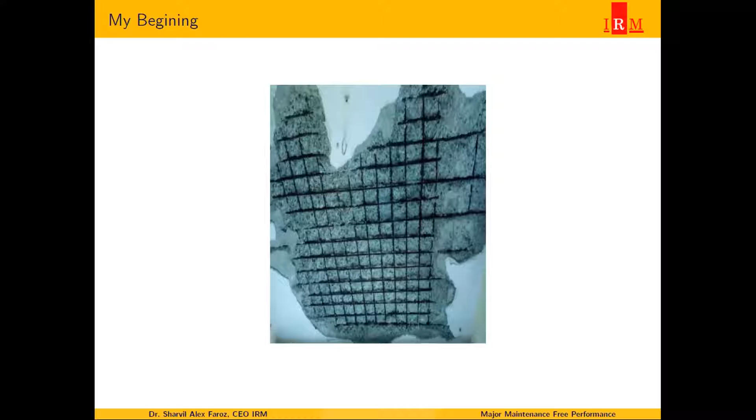So my only motivation when I began my career was to prevent such a thing from happening, and that is how we came to the technology of major maintenance free life for infrastructure.

You might be asking me, is corrosion the only effect which causes such deterioration? Of course not. There are many kinds. There is chloride induced corrosion and carbonation induced corrosion. There is also loss of concrete strength over time, and in case of bridges, loss of pre-stress. So all of these are factors which cause degradation or such collapses.

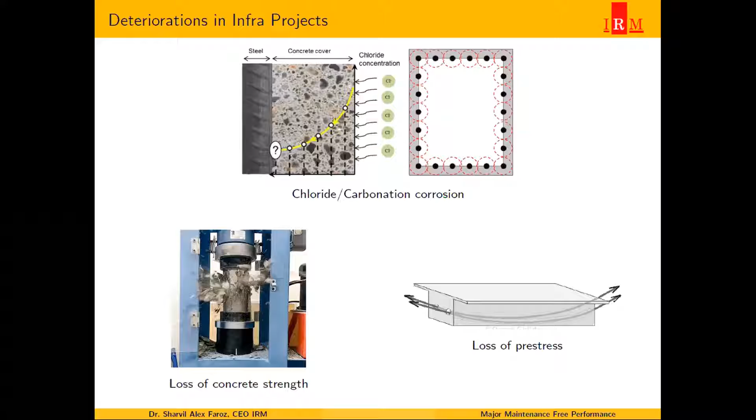But to keep the focus very limited for this presentation, I am going to talk only about chloride induced corrosion. Since I am getting only 1 hour for my presentation, I cannot cover everything, but I will focus only on chloride induced corrosion.

Chloride induced corrosion has been found to be affecting everybody everywhere. Even that electricity pole which is there - Sawantwadi is about 20 kilometers away from the coastline, and even there we find that these simple concrete electricity poles are also corroding. I will give you two international examples of this.

On the left, this is known as the Ullasundet Bridge, built in Norway. After construction, within 25 years, this bridge had to be demolished. You can see it is in a very marine, chloride rich environment. Within this 25 years, they had to continuously keep on repairing this bridge again and again, and at the end of 25 years, you'll be surprised to know the cost of repair was equal to the original cost of construction of the bridge.

So just imagine, today we are talking about 100 years life for bridges and infrastructure. If we wanted to keep this Ullasundet Bridge for 100 years with repairs every time, we'll have to spend 4 times the project cost. So once you spend one amount for constructing, you then keep on repairing it.

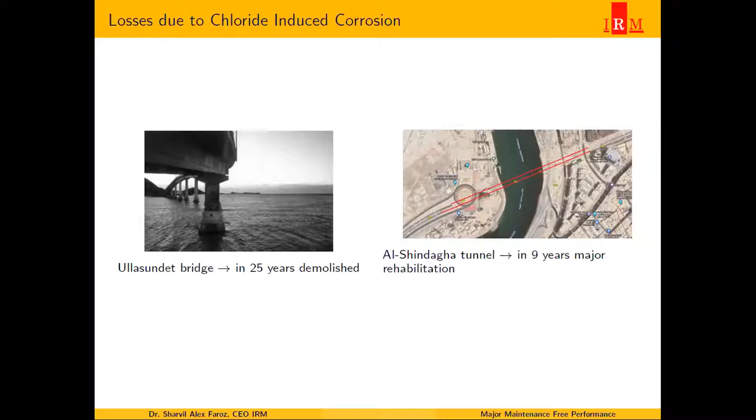This one, the Al Shindagha tunnel on the right side, is in Dubai. This also got so much corroded - it is under a river very close to the sea, so there is a lot of chloride. Within 9 years, it had to be rehabilitated. So you can imagine how severe chloride-induced corrosion can be.

Now, before going any further, you might be asking me, what is major maintenance free, and what is just maintenance free? There is a difference, let me tell you. Just maintenance and major maintenance are completely separate terms. Just maintenance means regular cleaning of the bridge or any infrastructure, keep giving paint to that bridge, cleaning it - this is known as maintenance. This maintenance we cannot avoid, we have to do it.

But what is major maintenance? Major maintenance is the rehabilitation which we do to the bridge after it has deteriorated severely. As I told you, for the Ullasundet Bridge case, that repair cost is 4 times the project cost. So that is where I am focusing - on major maintenance free design for a particular infrastructure, so that you do not require to do any kind of repair in the future at all. You design it now itself in such a way that it does not require any major maintenance in the future. That is the overall concept of my presentation.

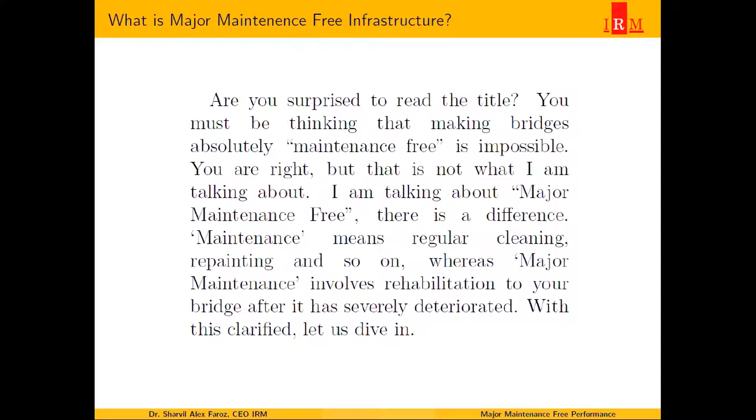Since I have been working in this industry, I have been in contact with various bridge owners and infrastructure owners. They have come across this trouble where they have to spend a lot of money just to do the rehabilitation of bridges. They are becoming aware that if we design it for a longer period of time and delay the rehabilitation, we'll save a lot of money, and that money will help develop our nation. Instead of just spending on repair, we can spend that money on the development of our country.

So I have always come across these 7 questions. In summary, what all these 7 questions are is, they will always ask me: can you design this particular bridge so that it will last for 100 years? Okay, now it can last for 100 years. But what is the point if it lasts for 100 years and you have to repair the bridge every 5 years? So what they are intending is, can you make this bridge completely rehabilitation-free for 100 years?

Then, what is the first time of rehabilitation? This is a very important question when you consider existing bridges. Existing bridges which were not designed considering maintenance-free technology are always going to have a rehabilitation problem. So this is also one of the issues. When should you do the first repair of the bridge?

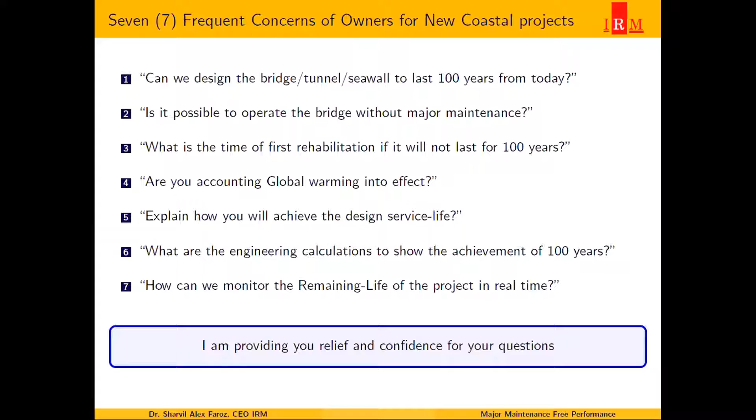So basically these are the 7 questions, as a summary I have told you. And as a company which provides solutions for such issues, what I am basically providing is relief from these questions which could be arising for such infrastructures. So now I'll begin.

First few slides I will always dedicate to research, because without research nothing can be done in this world. So a few slides on the research part which we have done before coming to the industry, as part of my PhD at IIT Bombay.

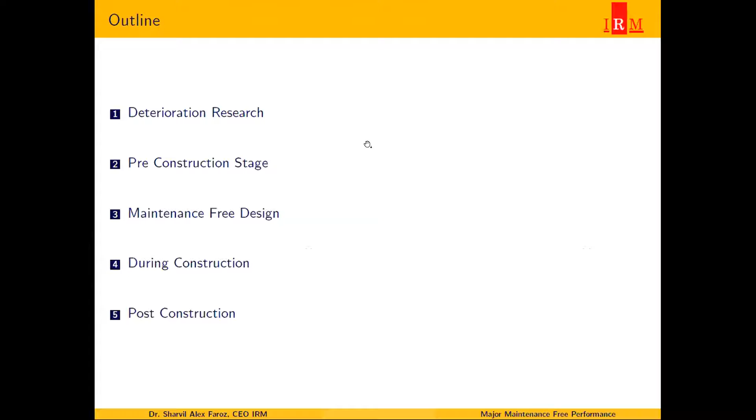Primarily this part of the research, we wanted to understand how exactly the corrosion is affecting the structure. So we had to study the effect of chlorides on concrete and on corrosion, how it affects the strength of concrete and the strength of the steel. So we had conducted a lot of lab tests.

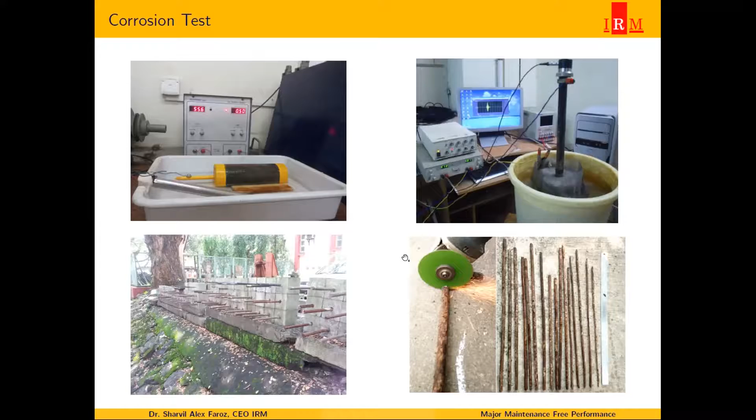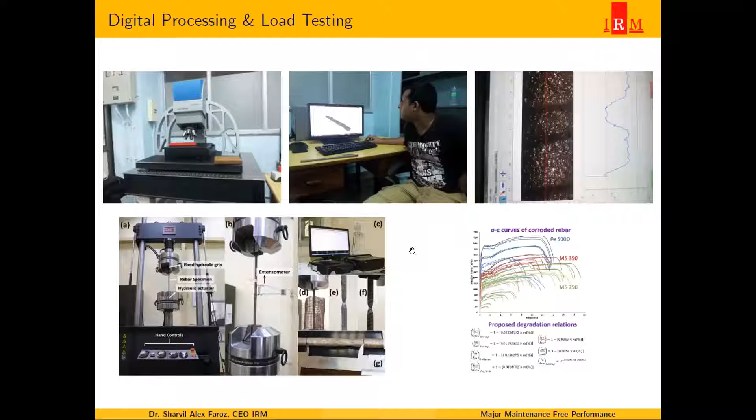We also did a lot of actual exposure tests. We also got a lot of concrete samples from existing infrastructures for performing tests, so that our lab tests could be related with the actual site conditions. We also did a lot of advanced laser technology to identify the variation of strength due to corrosion, how corrosion is affecting the rebar. We found out that as the level of corrosion increased, how does it affect the strength of the steel reinforcement.

Then, how does that chloride travel through the concrete? How does it go into the concrete? That also we had studied, and we developed models to understand, for every type of concrete, and for a given amount of chlorides attacking it, what will be the speed at which that chloride goes into the concrete. This is very important to know, because I will explain it to you later.

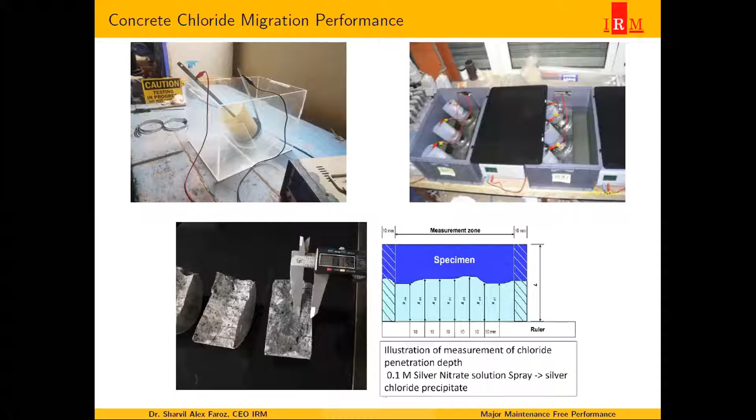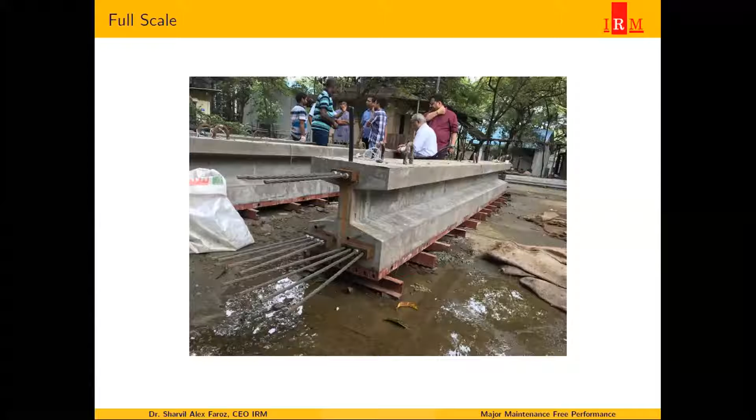We also did full scale tests. We did a pre-stressed I-girder concrete girder and saw its performance, how it behaves under corrosion. So our technologies are very tried and tested, and we have also implemented one project which I am going to show you, where we have done these calculations for them. That is the case study which I am presenting to you.

One slide about my company, because unless you know what I am doing, you won't understand how I solve the problems of our nation. We are the people responsible to deal with any kind of infrastructural troubles you have.

We have 4 specializations. One is remaining life analysis - what will be the remaining life, how long the structure can last without rehabilitation. Target life rehabilitation - very specifically, I want a life extension after rehabilitation to be 10 years or 15 years precisely. We have the capability, since we know how the material behaves under deterioration, to provide you with the exact life.

Life cycle management and structural health monitoring. Today's focus will be maintenance-free strategy. That is what I am talking to you about today.

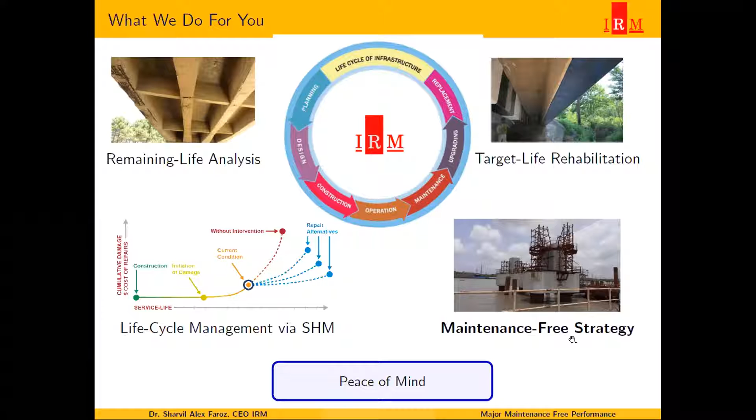Now you will ask me, what does it mean by 100 years? Of course, these new bridges - you might have heard many metros are coming in our state, Mumbai Metro, Pune Metro, Nagpur is there. They are all specifying in the tender document a life of 100 years or even 120 years.

Now you can put in the chat - how many of you have come across some consultant designing this? How many of them give the guarantee that this structure will not have any major repair during its life? I did not find it personally. Whenever I asked clients' consultants who have been working with them - but because of trouble from these major repairs occurring, they contacted me to solve their problem. So I asked their consultant, do you give a guarantee that there will be absolutely no repair for the structure? They say we cannot give that. But then I tell them, the code says your structure should be without any necessity of major repairs - how do you answer this? So they say we don't know how to do it.

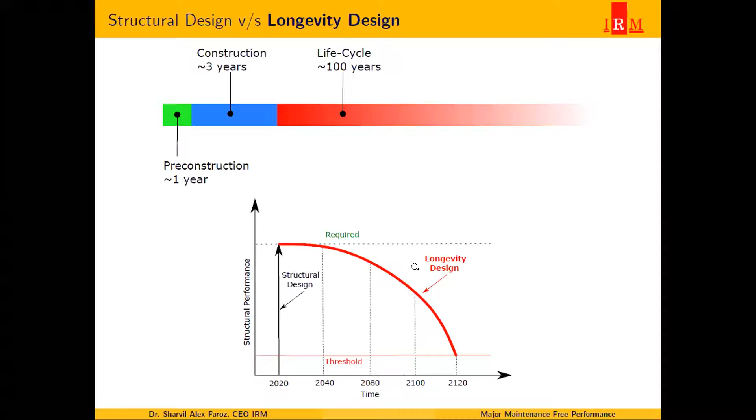So I'll be talking about the Mumbai Coastal Road project. This is a very famous project going on right now in Mumbai, famous because of many controversies - it has been stuck, then started, and so on. This is a very coastal area, highly affected by chlorides. Therefore, I chose the topic of presentation for chloride-induced corrosion. It's not that other deteriorations don't happen, but chloride occurs at such a fast rate that the bridge will collapse because of chloride corrosion first.

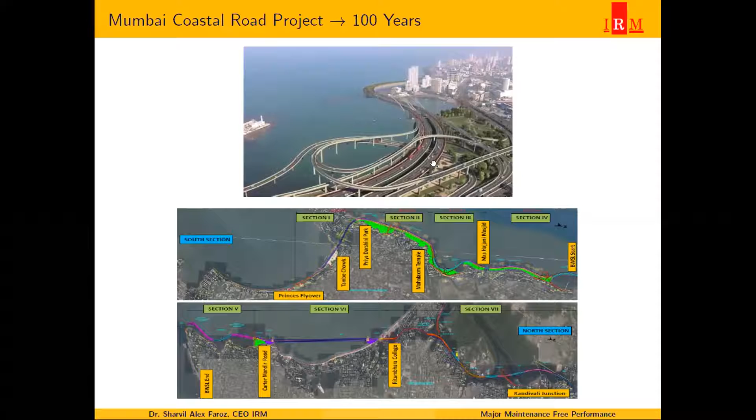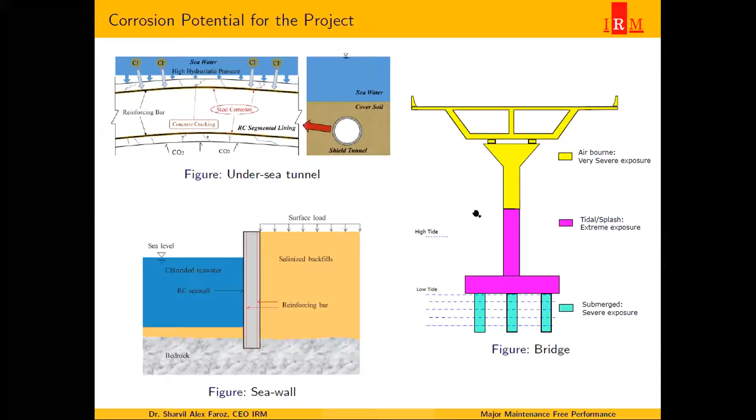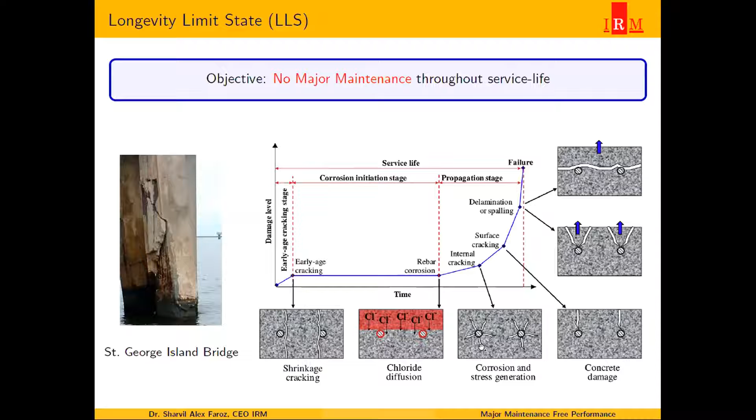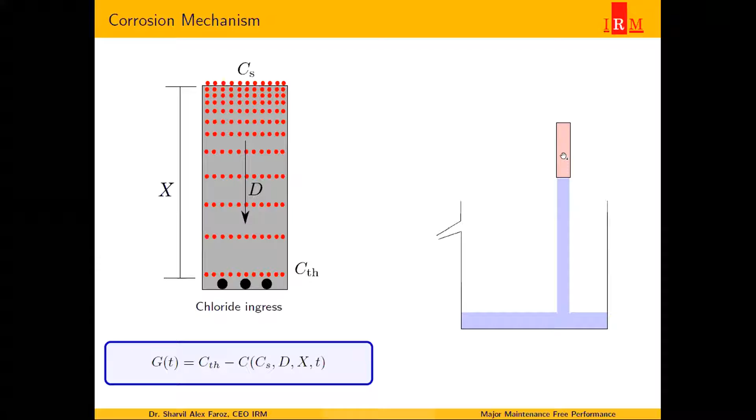To give you a simple example, consider that you are filling a bucket of water. This water which is falling inside, these are the chlorides. So you keep on filling it. After it has reached a certain level, the water will start flowing from this outlet. Similarly, when this chloride reaches a certain CTH value, only then will it start flowing and start corroding. So that is how you can understand this.

Now we have to put the design equation. This box you can see is known as the limit state function. We have seen limit state of flexure, limit state of shear, limit state of torsion. Similarly, this is also a limit state. I call this the limit state of longevity, because we are making it maintenance free, so it has to live long. What you see here is the CTH value, and this is the chloride concentration function, with D, X, and the time from the time of construction until what time is achieved. So when this equation can be equated to 0, our corrosion will just start. That is the limit state which we have to use for design of the structure.

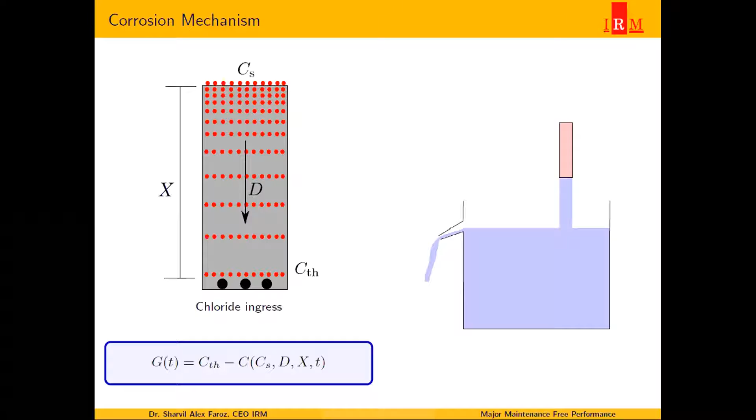Now I have shown you this slide before. All these terms are there. We have to define them, so whenever you take up a project, you have to define all of these terms first. Define in the sense not in words, but you have to quantify it. You have to go to the field, do some measurements, and know what are the design engineered values which we have to use for design. Just like when you are designing a girder or a beam, you need to know what is the live load, what is the floor finish, what are the earthquake forces which are occurring.

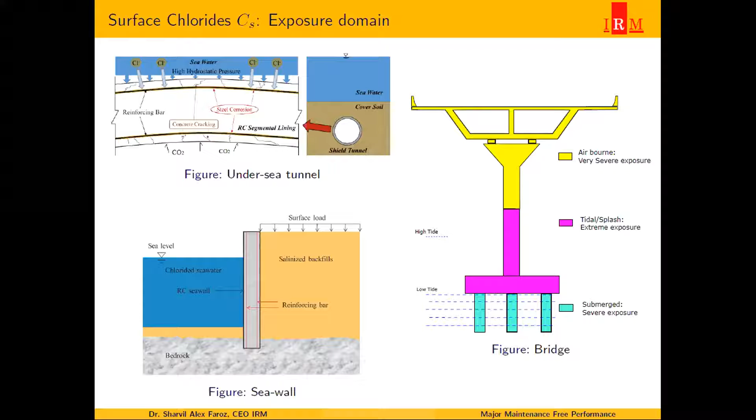Now you will ask me that in structural design we don't measure these values, correct? Do you agree with me? We don't measure because it has been standardized by the code. But in terms of deterioration, this chloride load varies from place to place. It cannot be standardized. One project I do in Mumbai, another project in Cochin, another in Chennai, all the conditions will be separate. So you cannot standardize it. We have to go to the site, perform the measurements, and then arrive at what is the amount of chloride loads. So we have to first define the chloride loads for each of these structures.

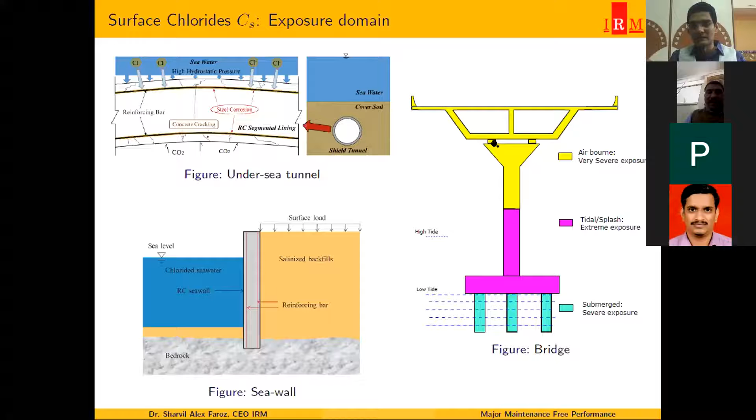Now for this project, the coastal road project, a lot of measurement has been taken along the coastal region, and we have come up with what kind of chloride concentration should be considered when we are designing each of these three structural components: bridges, tunnels, and the seawall. So we have defined this chloride concentration. It has a unit of percentage of weight of cement, always defined in terms of percentage of cement. So one meter cube of concrete you have taken, say 350 kilograms of cement added to this concrete, so the amount of chlorides will be defined in terms of percentage of this cement.

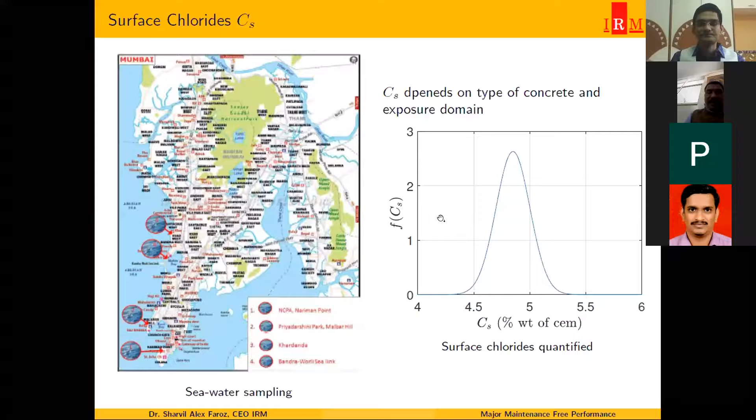Next, we have to define the concrete cover. Now this is very tricky. As per IS 456 and also IRC 112, depending on the conditions, we can provide a certain concrete cover for a given structure. Let's say 75 mm cover is provided. Do you think that while executing, the contractor will precisely provide exactly 75 mm cover?

But now the question arises: before constructing, how do we know what the variability will be? In that case, IS 456 has provided us a helpful guideline. It says that for rebar placement, they have given a tolerance for the cover. So they have said that for an actual provided cover, say 75 mm, plus minus 15 mm or 10 mm is also there, depending on the size of the structural member. This will be the acceptable level of tolerance. So we can use this in the form of a probability distribution as the starting point for doing the design.

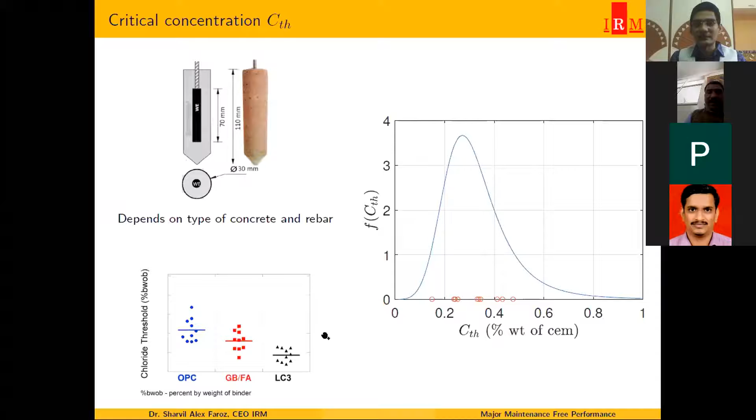So this need not be done again and again. Since we have all this database available with us, there is no need to do these experiments again and again. This is perhaps the most important part.

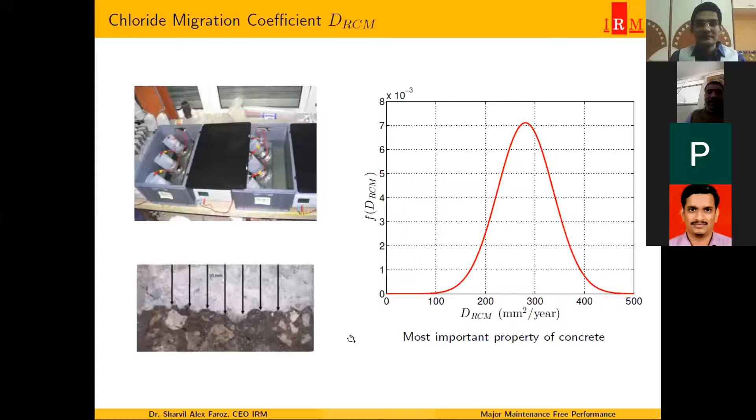The fourth part, which is the diffusion, or the D part, which we mentioned. How fast does the chloride penetrate the concrete? This is an experimental setup which you can see. In this lab setup, we force the chlorides to penetrate the concrete. This is the concrete sample which you can see, and the chlorides have penetrated into this white portion. We are fixing this time so that we are able to calculate the rate. So the depth we know, and the time required for going through that depth, we know. So we are able to quantify the rate at which the chlorides diffuse into the concrete. This is very important.

Now this property depends purely on the concrete which you are using, so this is a pure concrete property. We have worked this out for 30 concrete mixes, ranging from M30 concrete to M60 concrete.

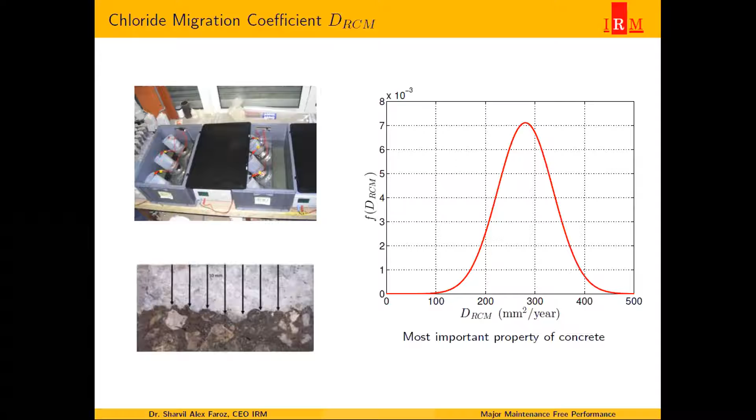We chose this range of concrete because these are the generally preferred concrete mixes for all bridge projects. So M30 to M60, we have in between 30 concrete mixes with various different kinds of cements, OPC, then supplementary cementitious materials such as fly ash, GGBS, and limestone calcined clay cement. Based on this, we obtained 30 concrete mixes, and we have worked out the rate at which chlorides enter into every concrete product.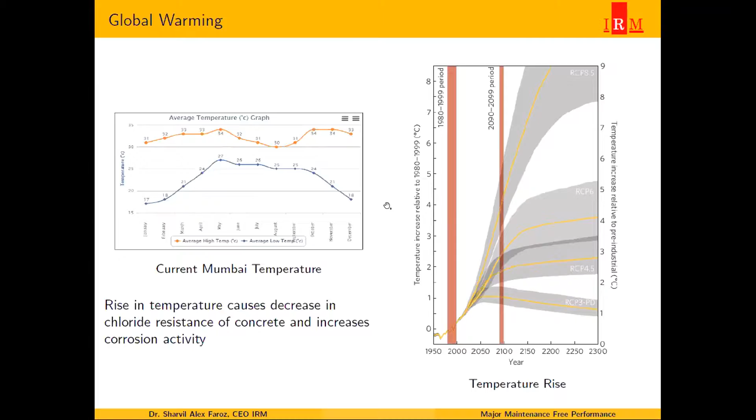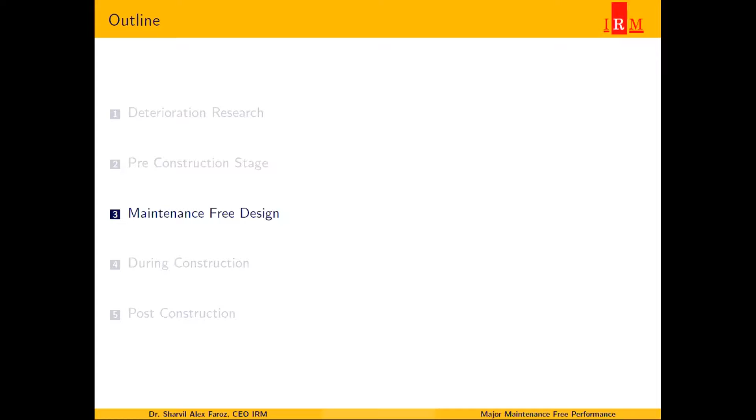So now we have done all our site projects and site measurements, we have quantified all the design parameters. Now it is time to design to make the actual project major maintenance free. This is our proprietary software which we use, called MFL 100 Plus. We developed this in our company, our own software which we use to design for major maintenance free, and all the calculations I'll be showing you are an output of this software.

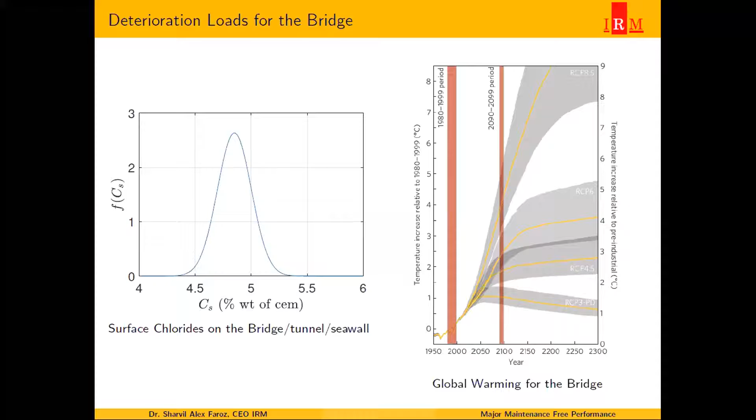So in this software, we first feed all the chloride loads, all the concrete related inputs, all the steel related inputs. Also the global warming prediction is given as an input to the software. So all our loads, all our deterioration loads are given as an input, and as an output we want the resistance parameter for the bridge project.

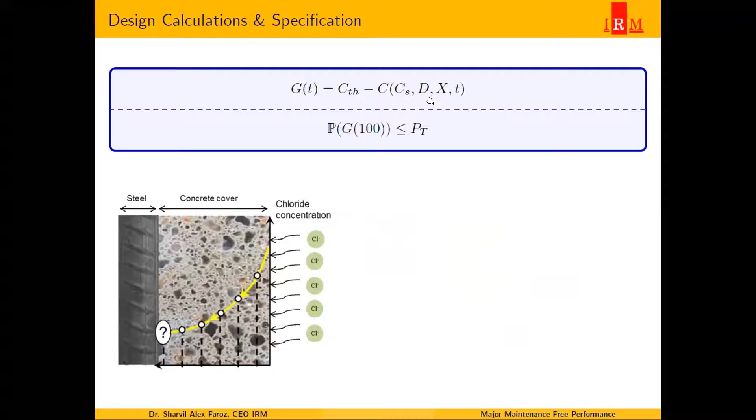So now let us see how the design calculation and specifications are created. I have shown you this limit state function called the longevity limit state function before. The speciality of this design is that it is not done in our regular deterministic form, it has to be done in a probabilistic form. So the actual design equation is this: the probability that this limit state function at year 100 is not exceeded should be less than a target probability of failure.

So in this equation, we have kept a target probability of failure. Now this target probability of failure completely depends on the importance of the structure and on the life of the structure. So if we have a long life, the probability will be less. If you have a shorter life, the probability will be high.

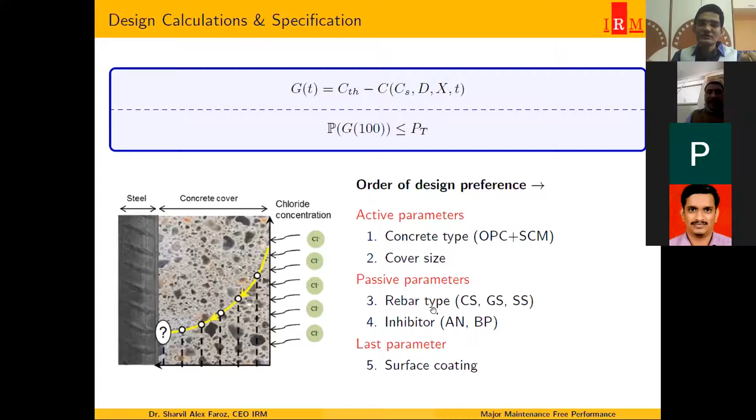Passive parameters are kind of more rigid to change because generally they are fixed, since they have limited scope to change. For example, if I use stainless steel, there is very little I can do in terms of changing it from stainless steel to mild steel. So these are kind of very difficult to change. Although you can change it, that is not an issue, but certain values have to be fixed in a design. Only then can we do the optimization of the other parameters, right?

Then we also have a corrosion inhibitor. What the corrosion inhibitor does is basically increase the CTH value. This CTH value here in the equation, you can see it increases. And the last parameter is the surface coating.

Surface coating inhibits the surface and prevents chlorides from penetrating at a very fast rate. So it slows down the chlorides.

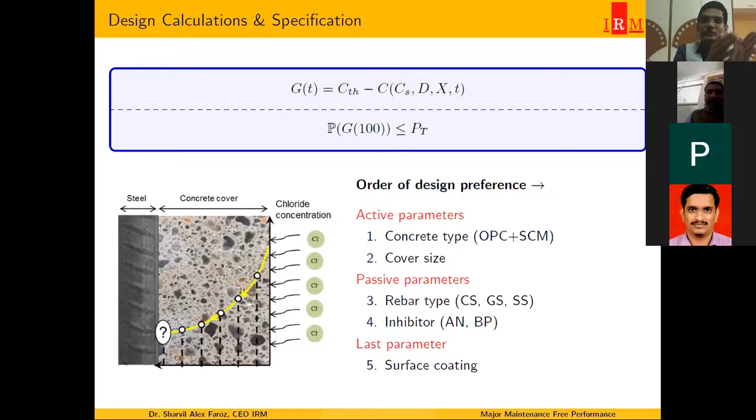Okay, so now let me take these parameters in detail. First, let us choose a type of concrete.

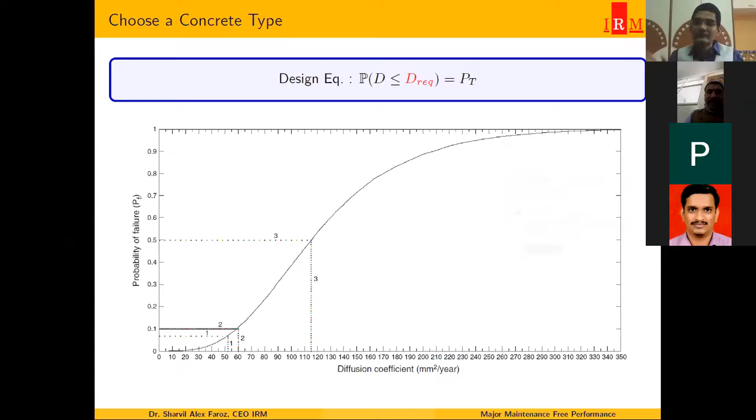Now, once we have decided this D value, how do we choose the concrete type? Remember, in the previous slide, I told you we have tested 30 concrete mixes from M30 to M60. So these are the 30 concrete mixes which we have tested, and for each concrete mix, we have found out what is the D value, the diffusion value. So once we have the required D from this curve, we check which is the closest concrete mix to our required value, and we provide that concrete. So very simple to implement.

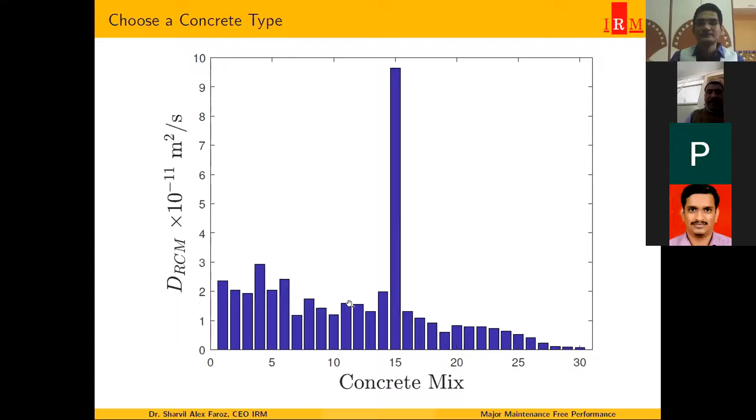Then a similar approach we also adopt for deciding the concrete cover. Here we have written the equation in a different form, but now in terms of the concrete cover, and the methodology is absolutely the same. We draw a horizontal line from the probability of failure, and we get a required service life or the required cover, whatever the case may be.

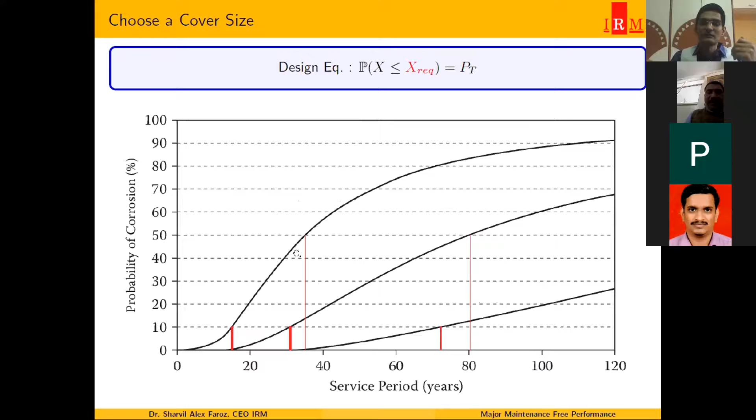Now we come to the passive parameter. First is the type of rebar. In this project we have decided to use three types of reinforcement: one is our regular carbon steel, the next is galvanized steel, and the third is stainless steel.

Now, which parameter of the design equation does the rebar affect? The type of rebar affects the CTH value, the critical chloride concentration value. For stainless steel it is higher, and for carbon steel it is the lowest. So if I want to use stainless steel, it has a much higher value of CTH compared to carbon steel.

But unfortunately, if you are using stainless steel instead of carbon steel, your project cost will be increased by 50%. That is the only limitation of stainless steel. Therefore, engineers, and even asset owners, are very reluctant to use stainless steel. However, if we are able to do a very optimized design strategy, called a targeted or surgical strike approach, providing stainless steel only where it is required, we can have a lot of savings over the complete life cycle.

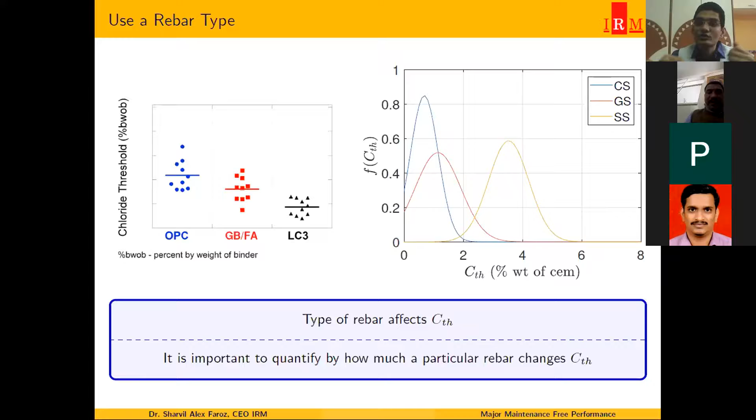That should not be your approach to design. You should first know the CTH value of stainless steel, because of two reasons: one, stainless steel is very costly, and two, what if stainless steel is absolutely not required, and the exposure or amount of chlorides is such a low condition that even mild steel could be sufficient. Just because it is closer to the sea and someone tells you to use stainless steel, you should not go for that.

Then the next passive parameter is the corrosion inhibitor.

These are becoming very popular these days. So we add about 1-2% of the concrete mix as an inhibitor, and this corrosion inhibitor increases the chloride threshold value, CTH value, for a given steel. That is the benefit of using inhibitor. But the use of inhibitor has to be decided by checking how much the CTH value is increased. The argument is same which I made for stainless steel.

People might be telling you to add the inhibitor, but is it really required? You have to assess through asking what is the CTH value for this, by how much my CTH value will go up if I use this inhibitor, and is it really required? That we can also work out through our maintenance-free design strategy.

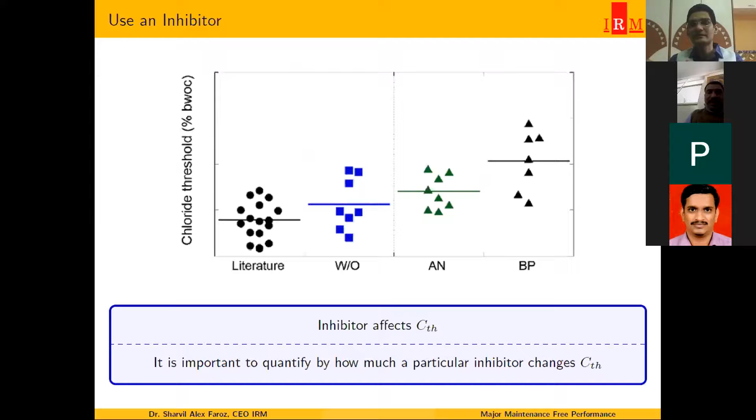And the last is the surface coating. I call this the last parameter because surface coating is something external which you apply. So even after your design, you are spending more money on something extra which you have to put on. So generally I advise to play with only the first four parameters: concrete cover, steel, and inhibitor. You play with all these components only.

But even after playing with these components and designing, you are not able to satisfy 100-year life. Let us say the life achieved with those four parameters is 93 years. Now this balance 7 years are remaining. Only then you go for surface coating. And in that case, now you know that your balance life is 7 years. Now considering this, you have to decide what is the amount of thickness of coating which you can provide.

Generally in practice, the paint manufacturer or coating manufacturer has certain thickness which they recommend to apply. Now how do you know that this thickness is sufficient to satisfy the 7 years or not? That is the question. So therefore we have to design the thickness, and we have these formulations. I am not putting all the detailed formulation here because of the limitation of time. But you must understand that it is possible, considering the life required, we can decide what kind of coating and what kind of thickness of this coating to provide. That can also be decided.

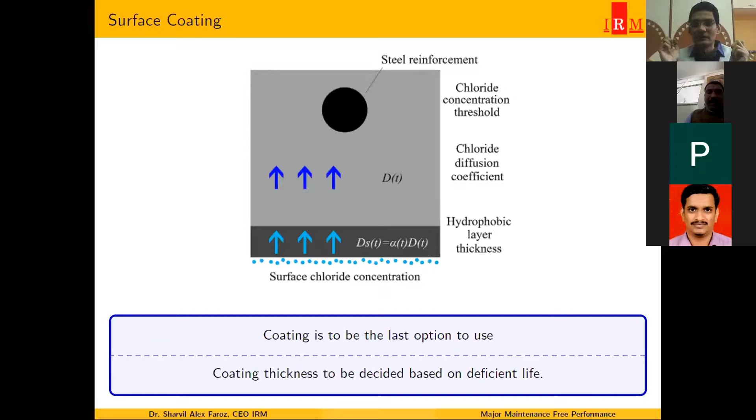And last, we are all interested to know the specifications. What specification should we tell our contractor for doing the work? This is an outcome of the software. So what we can do, as I told you, first we have to decide the target probability, the PT value which I showed in the previous slide. That we first decide for a given project. Here you see this probability, just shown for example what it looks like. So you start here, draw a vertical line.

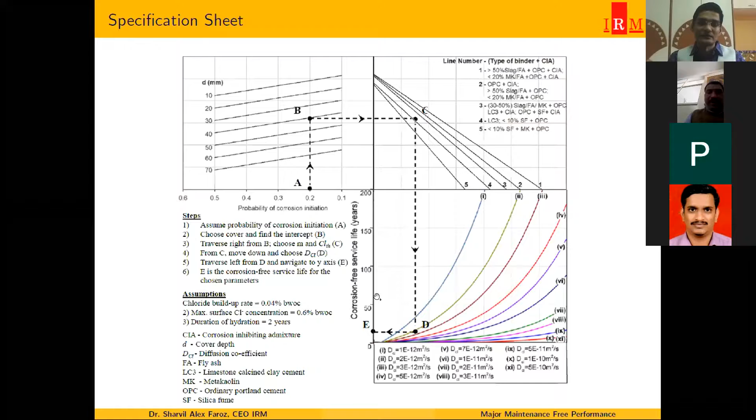Then for a given concrete cover, from that curve you draw a horizontal line. This is the concrete type. Wherever it intersects, drop a vertical line. This is the diffusion value for a given concrete, and from that you will know what life you will be achieving. So by adjusting this, you need not do all the analysis again and again. We have already worked out all these charts. So just by adjusting certain parameters, you are able to know what life you will achieve for a given project. So this can be directly given to the contractor and the work can begin immediately.

So all this work so far, we have done in our office. We have given all the specification: what kind of concrete to use, what kind of steel to use, what kind of inhibitor, coating if required, what kind of cover to provide. All this working we have done sitting in our office. As you know, as a civil engineer, what we do in the design and what is actually executed on the project is completely different. So our objective as an engineer is to match what we design in the office and what is executed at the site. We have to match this.

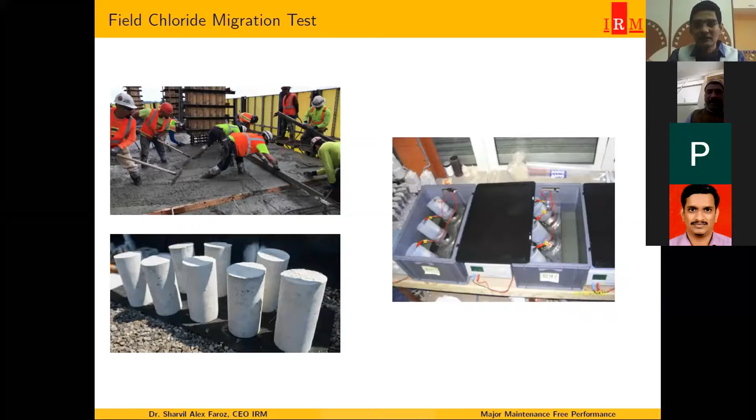So to match this, we need to do some tests on the site during the construction stage itself. Now when the construction is actually going on, IRC 112 suggests that you take some concrete and cast some cubes or cylinders for testing the concrete strength. They give the specification for concrete strength. But since we are experts in the maintenance-free design, we also use these samples to test the diffusive property, the D value of the actual executed concrete. Because what happens, we specify the concrete mix design to the contractor, but sometimes the contractor will not satisfy exactly the mix design. So we should know whether the contractor satisfies our requirement or not on site. That we should check through this test again.

Then we also do the resistivity test on samples of concrete. Resistivity has a very good correlation with the diffusion property, or the D value, of a given concrete. So this resistivity test can be indirectly used to check the as-built condition of the structure without actually performing the diffusion test. And another advantage is that this resistivity test is very fast.

So during the construction stage, if we get some samples and establish a relationship between the resistance of concrete and the diffusion of concrete, this can be easily used to test the post-construction structure.

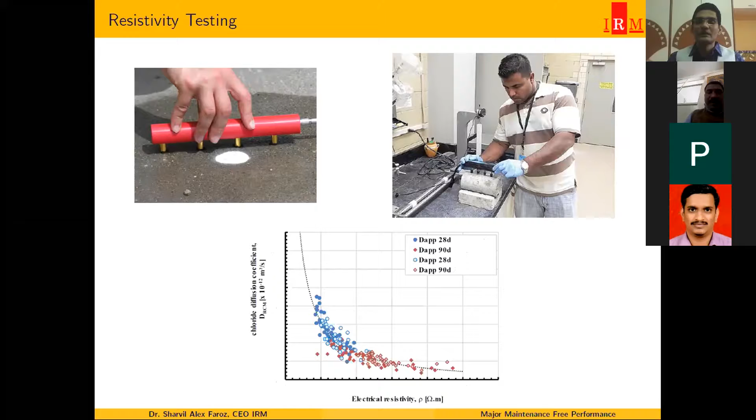Then we also have long-term verification technologies. The client will particularly ask you, you have designed this, but we want to monitor its performance over time. So we have developed this sensor, which is also an outcome of my PhD. Thanks to the Ministry of Human Resources and the Ministry of Road Transport and Highways, we got a very good response for this, and people are now implementing this technology.

So what basically happens is this: during construction, this sensor is installed, and it keeps track of the chlorides in the concrete, updating you at whatever interval of time you want. It keeps updating you, and you get the real-time value of the life of the structure. So even if some trouble happens in the future, you beforehand know where and what kind of corrections should be done, and most importantly, what is the balance or remaining life of the structure. This is an SHM technology which we implement.

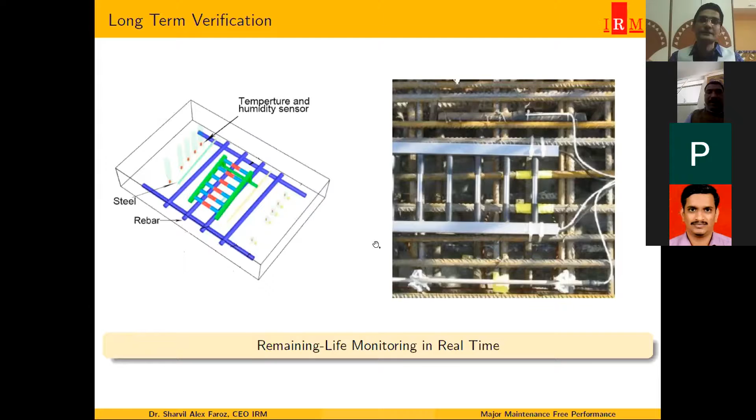In addition to this SHM implementation, there are some other requirements from the client. The client asked me to take some samples of concrete and keep them at the project site, for example on the pile cap, in an actual exposure. The logic behind this is that if we want to test these samples in the future to check performance, we check on these samples rather than doing non-destructive or destructive tests on the actual structure itself.

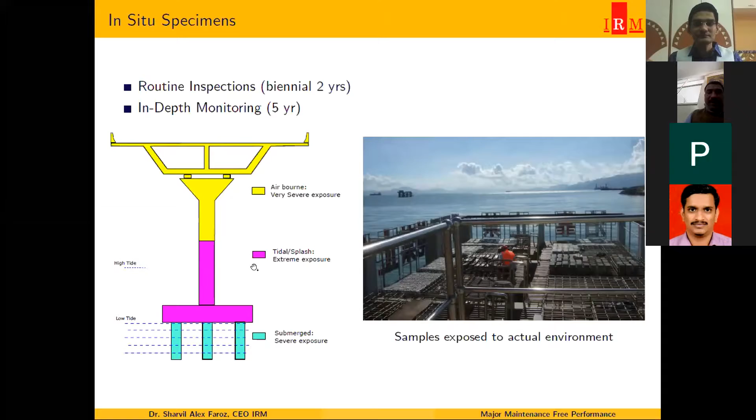So now we have kept track of all the diffusion values and all the resistivity values. Now the structure has been completed, and the contractor has handed it over to you. But the client still has a doubt: has this contractor done a proper job or not? How can we verify this? Because the client is spending so much money.

Let me tell you, this Mumbai Coastal Road project cost is 12,761 crores. If you are spending so much money and you cannot achieve a 100-year life because of the contractor, then it is a really bad thing. So the client always has a doubt: has this project been executed properly, and is the 100-year life really achieved or not? That we have to check.

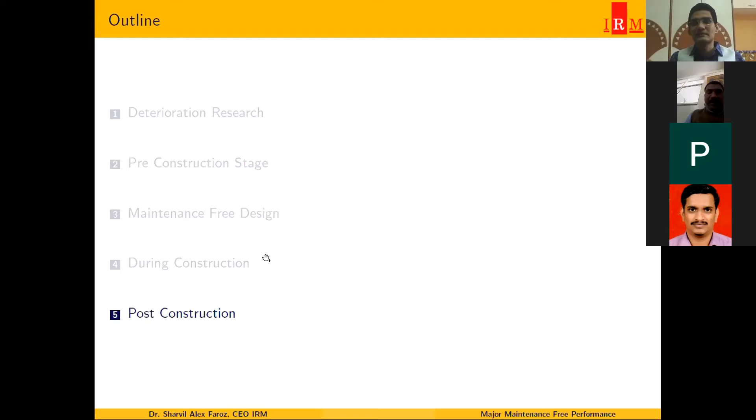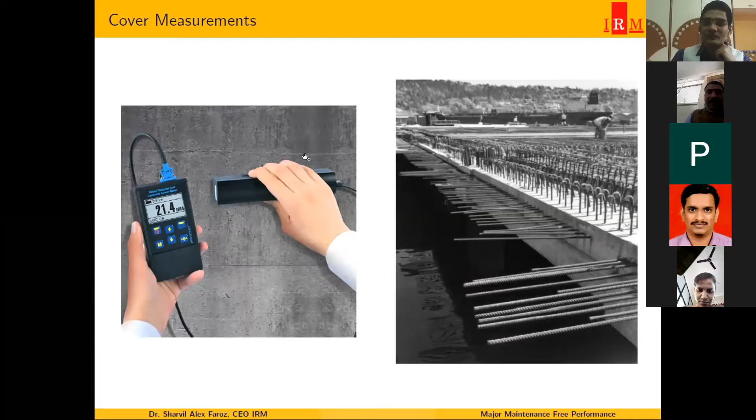So that I will cover in this post-construction stage part. We begin with the measurement of the concrete cover. So now this pier has been constructed, and we want to check what concrete cover has actually been achieved on site. I'll show you one example: this is a deck, and we wanted to measure the size of the concrete cover. The specification was 75 mm cover, because since it is in such a marine environment, a high cover was provided. So we made a grid marking on it and measured the concrete cover at each and every location.

And we created a histogram, which you can see here. We found the average value to be 73 mm. The actual provided value should be 75 mm, but because of construction errors, the project was just 73 mm, and there was some standard deviation also, so exactly 73 mm was also not possible. It ranged between 60 mm to 80 mm.

So now we know the construction has not been up to the mark, there is some deviation there. So now we have all the data on how much it is deviating. This is most important — having the data of how far away you are from your target is very important.

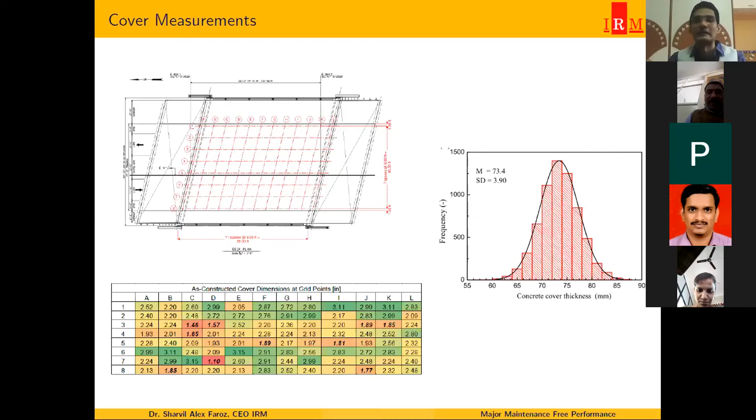Only then you know how you can achieve that target. So that we know now. I told you resistivity measurements also we had done. Now these resistivity measurements will be done on the actual site, on the actual pier. So these pier locations are marked where the resistivity measurements are done.

Now this resistivity, we had previously established a relation between resistivity and diffusion. So for the resistivity value, we know what is the diffusion value. Based on that, we have also constructed a histogram for the diffusion value. So we are very rapidly able to evaluate whether all the construction properties have been achieved or not.

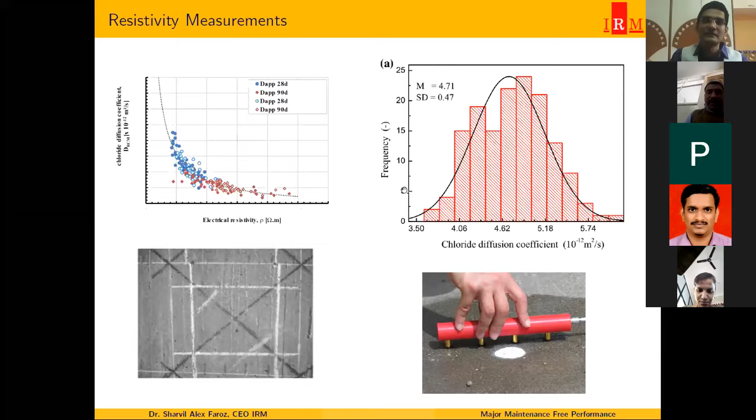So it is very important that we quantify what are the post-construction properties of the structure. Now with all of these inputs, all of these structural measurements which we have taken, how do we use it?

Now the asset owner wants to know if the 100-year life is achieved for this project or not. So what we should check is, using all this data, we should perform a remaining life analysis through all these input data. And if that remaining life analysis shows it is satisfying 100 years, then the contractor can be accepted, the project can be accepted, and the contractor can be made full payment.

But after this remaining life analysis, if we find it is not satisfying 100-year life, say it is satisfying 97-year life, just 3 years short, then in such a situation the contractor should be asked to make changes to the design. Of course, since the structure is already in place, we cannot do major changes, but we can go for coating to provide the additional 3 years of life. In this case, since the contractor has defaulted by 3 years, we'll ask the contractor to pay from his own pocket for this remaining life of 3 years, because he was not able to satisfy it.

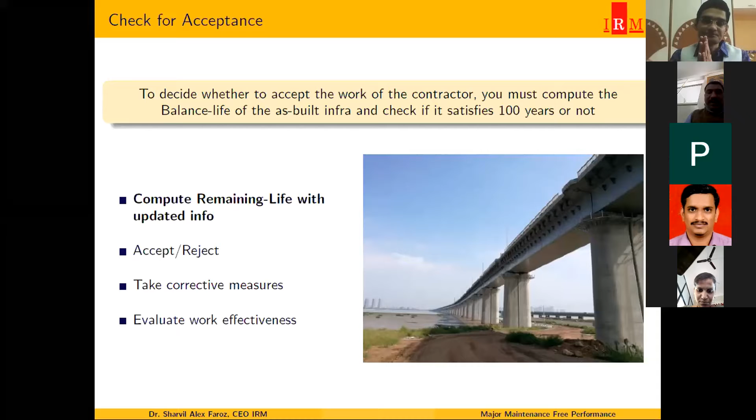Now, if the achieved life is 57 years, which is 43 years short, then of course you have to completely reject it. But since so much investment has been made, it becomes the liability of the contractor to take up the corrective measures. So this is how we should provide a complete 100-year life to a structure.

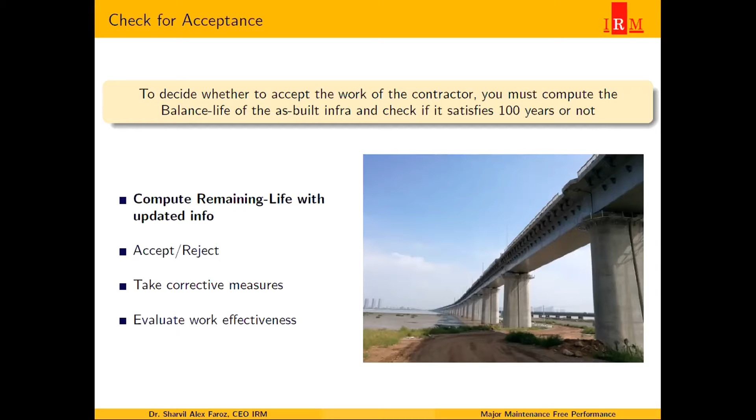Now you might be wondering if this is the complete technology which I have presented to you. First of all, remember I have been allotted just 1 hour here, so I am not able to present the complete technology to you. But what I have tried to present is the general steps one should follow, the steps you should take for achieving the target when a project comes to you for designing for 100 years, or any target life. If they want, you can use this technology.

There is a limitation to this, as I told you I have not presented everything to you, but I want you all to use this technology, because ultimately what we are doing is making our nation repair free. All our infrastructure we are making repair free. Plus we are also able to know if the contractor has done the proper job or not. So you can see all of these advantages for making a maintenance-free design.